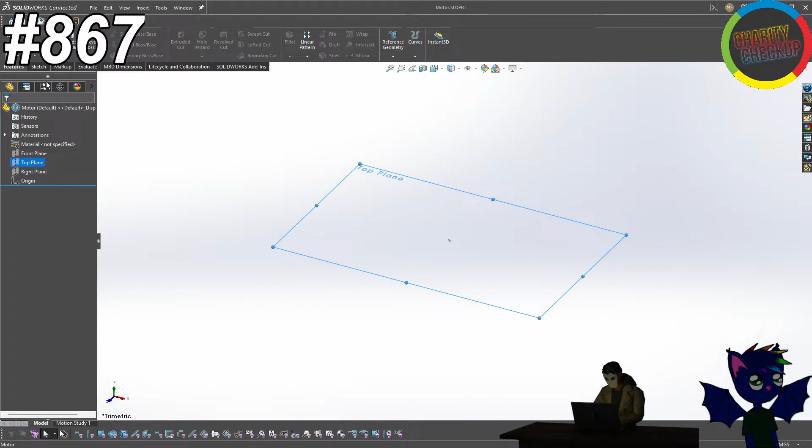37.5, I imagine. $37.5.

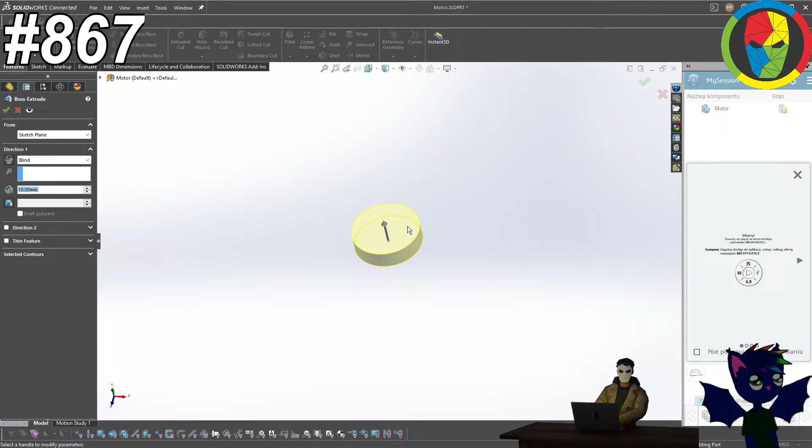Little things that will happen. Okay, then what we have is we have it going upwards, and goes upwards by... well, it would appear to be 57. It's difficult. 57. All right, appears to be right. Then at the back, and then at the front.

At the front we have a little bit of a cylinder with 4.5 millimeters upwards. Right. Wait, no, 4.5 millimeters upwards, I'm an idiot, 5. It's actually 5 and 13.

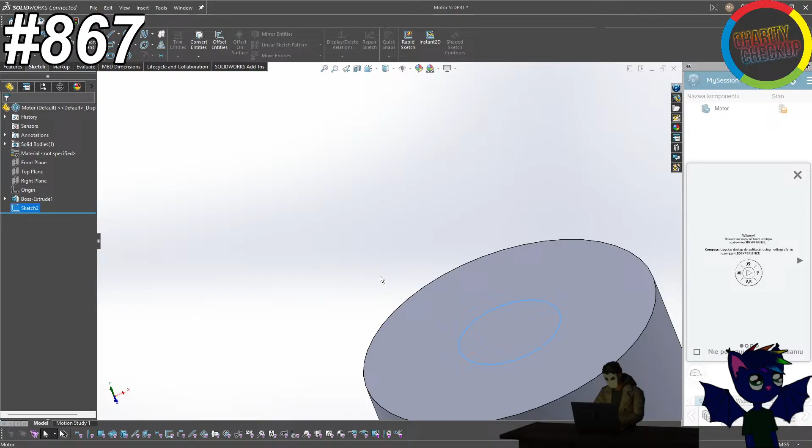2 millimeters height, 3 millimeters width. Perfection-ish, that's because then... actually, let's do 8.5 instead. 8.5, perfection-ish, yeah, we need the gear.

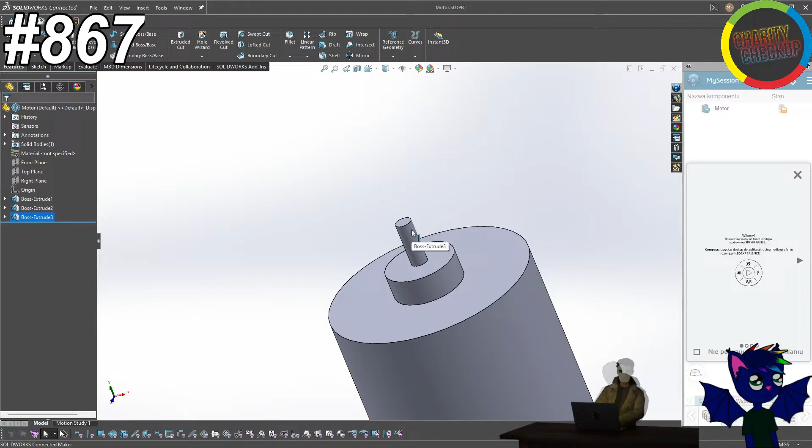Yeah, you got it right, David. Like... yep. It just got me off guard because first, I'm not expecting to see Hungarian text over chat, and second, it feels so random yet still accurate.

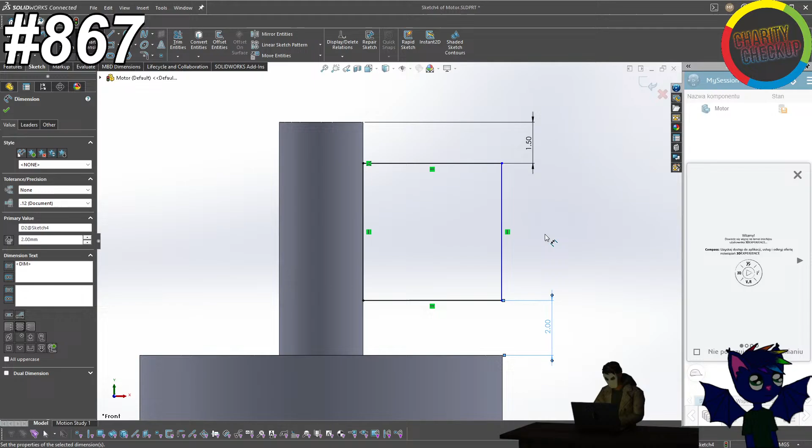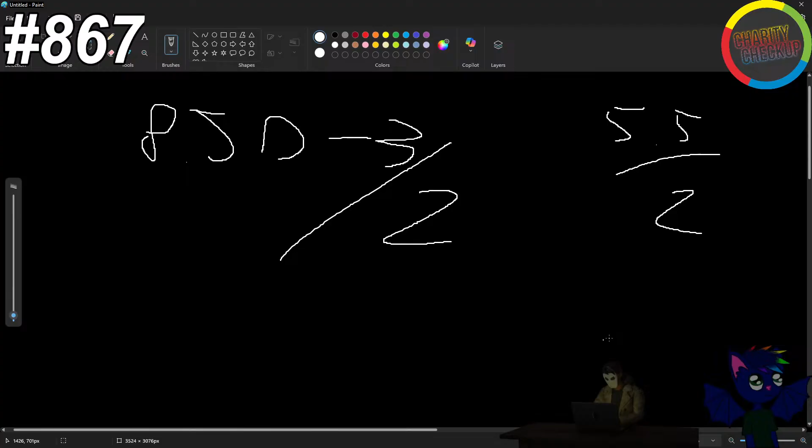Yeah, so this would be the divide by... oh shit. That's 8.6, 8.5. Eight point five, then that divided by that minus 3. So 2.75, I think it's 2.75. I'm pretty certain, not really.

Revolve cut? No, what I want is revolve boss base around axis being... oh shit, don't I have like... okay yeah, so I need an axis first. Gotcha.

Beautiful, this will be our gear. Sick and sweet. Hi, the cutscene, hi and welcome. Now all we need to do is we need to somehow cut into it. Which, how difficult should that be? Good question, alright, we need to cut into it to represent the teeth. Jeez, this is rough. And this is just the first part. Ain't that fun?

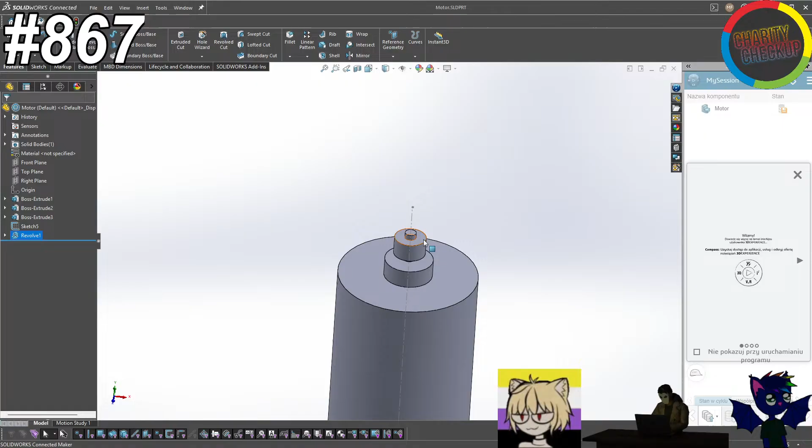Is that for Botty? It is for Botty, in fact, yeah, remaking Botty completely. A millimeter, okay. I gotta go, alright bye Mashrid, bye, have a good one. Bye, bye. We need a millimeter going in.

Then how many of them do we have? We have 1, 2, 3, 5... 12, we have 12. So we have 12 teeth, which would also mean 12 cuts. So we need to make 12 cuts into it. And each cut has to go a millimeter in, I think. Let's do a millimeter in and then... nah, shit. No.

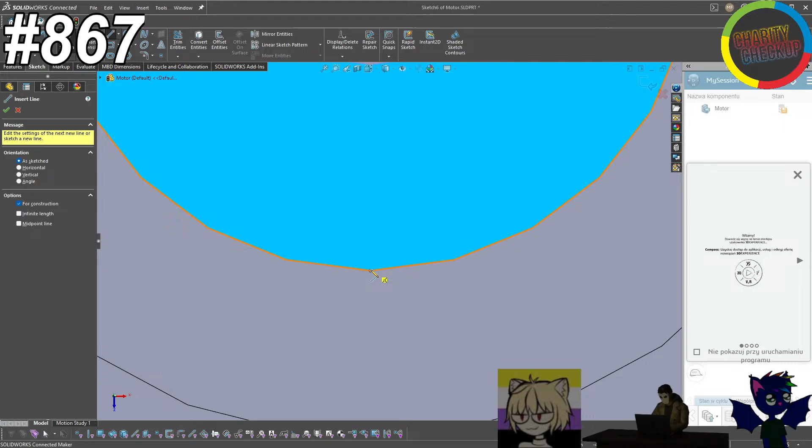Is there a hotkey for just turning on a tutorial to SolidWorks? That's curious. Okay, so 1.

So, style spline, and let's do it like this. Let's do 0.6. And we'll just have to eyeball it.

Is this the 3D printer app? What was it doing? This is SolidWorks, it's for designing things. But yeah, I'm gonna design for 3D printing, so pretty close.

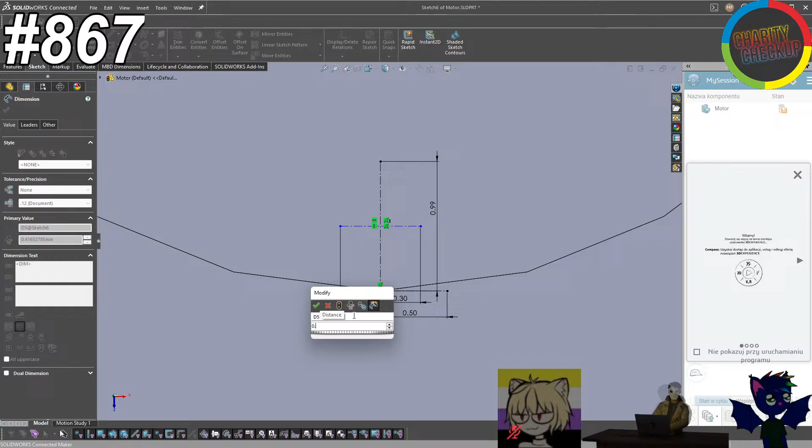This time with 0.5? I have no clue. How's your cat doing? Messing up everything. It's awful. It almost broke the camera, this stream. Cat being cat, it is pissing me off.

Already, okay, there we go. I think this should be good. I'm fairly decently certain.

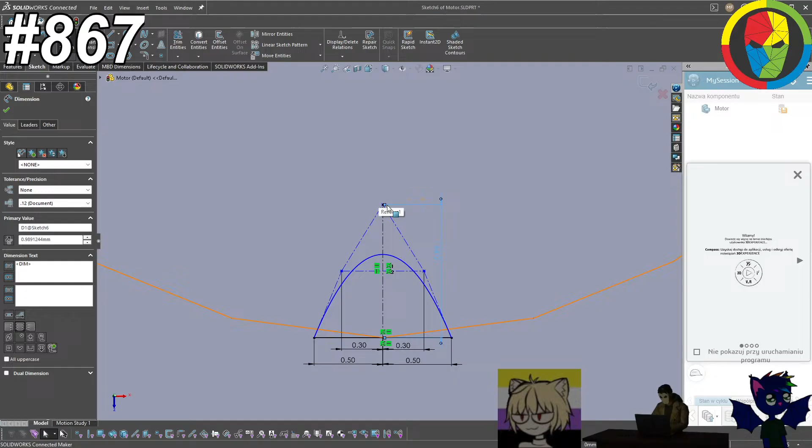But no, wait, because this is a millimeter, and so we need the peak to actually reach the millimeter. What are we doing? Which means right here we should have a separate line to use as a reference. Yeah, no, we need a separate line to use as a reference. To be fair, I just realized I don't actually need to model this gear that well. But whatever, we're stuck here. I'm doing it. Let's do 4.

Now I am pretty certain that if I just increase this number to a 7... Oh, you little cheesy bugger. Which means we can delete this.

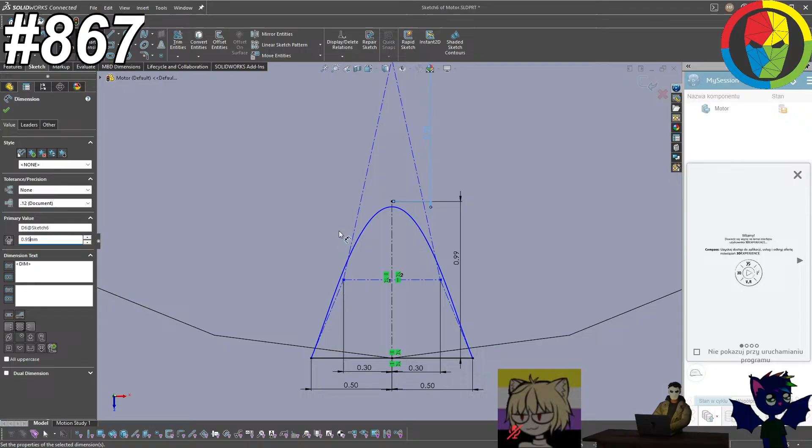And we can increase these numbers: 0.6, 0.7, 0.9, 0.95, 1. Oh, it makes sense at the half. Right, that does track. Okay, perfect.

My little dog's doing the same thing in the back, so don't complain about it. What is that? What is that comment? I don't have a dog, I have a cat. Bird. I don't have a dog that's annoying me, I have a cat that's annoying me. You have 2 cats that are annoying you.

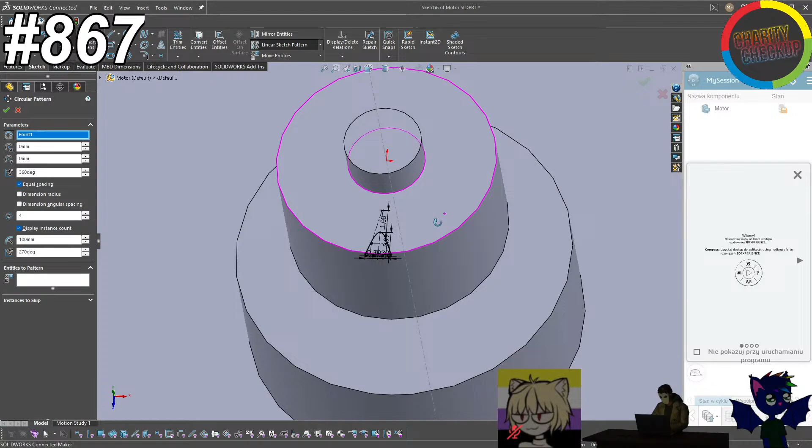Oh wait, is that direction? I don't care about that. Entities. Oh, entities to pattern, that's what I'm missing. There we go, we need 12 of them.

Yeah, I knew I fucked it up. Fortunately though, I'm pretty certain that if we just increase these from 0.5 to 1, or even 1.2, is good enough? I hope it is, or whatever, doesn't matter. You will explode in 5 seconds.

What's your problem? Hydroatomic! Jeez, it's been a while since I've seen you. Hi there, how you doing? Hi!

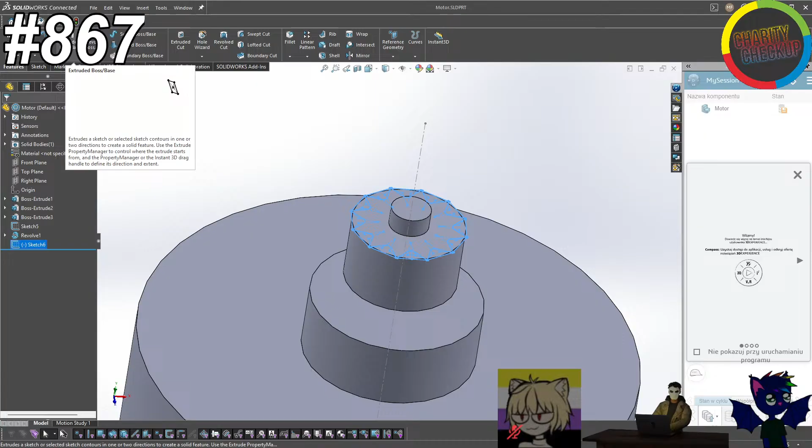Naked, when is your second quaternion video coming out? I don't know, I'm having a lot of fun with practical videos at the moment. So when I get bored of them... don't know how long that's gonna take.

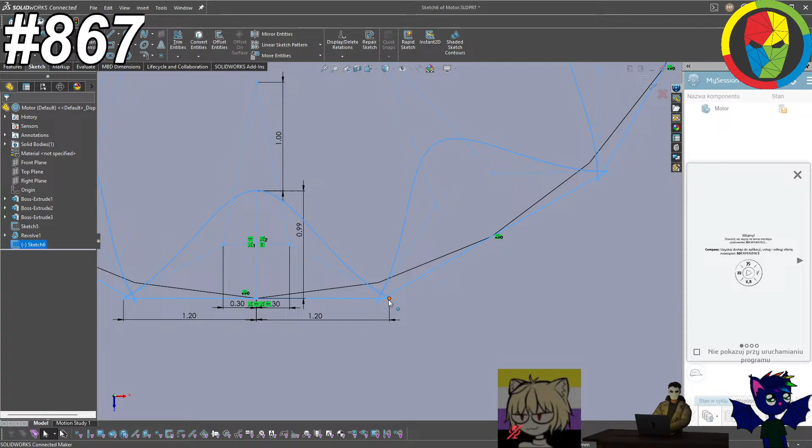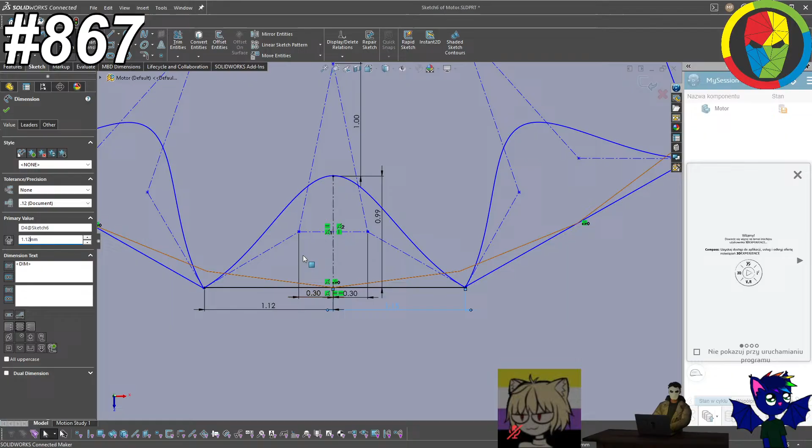In this case, I imagine the problem is these intersections. I have no clue. I think that's the reason, because this should be enclosed, shouldn't it? Unless I need to match it perfectly, in which case 15, I'm guessing. I'm guessing this would be it then. Yeah, that was the problem. Okay, good.

There we go, I have made a gear, behold. Spicy politics - oh yeah, yeah, it's actually taking a lot of effort nowadays for me to ignore them on stream.

That's just a sine wave in disguise. Not really, because I modeled it manually.

Okay, so then what we want is we want... oh, we want actually a couple of things. Yes. Oh yes, oh yes, oh yes, we do.

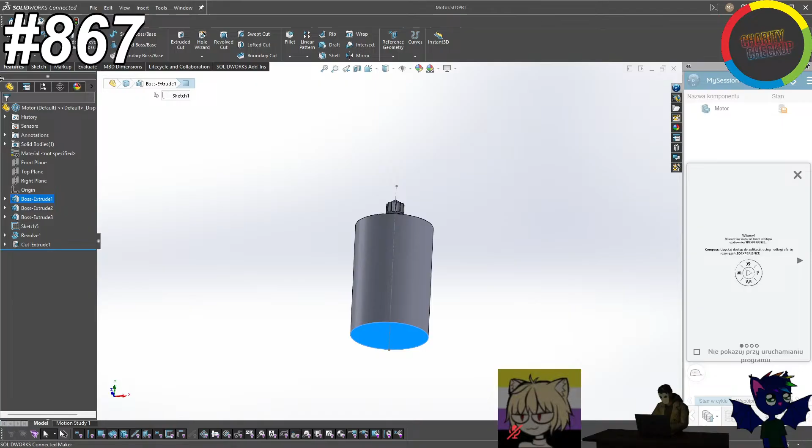That's because, you see, first of all, we need the dongles. Thought we were building a fusion reactor, sad. Unfortunately, not quite the budget. He's actually making a homemade RTG.

29. They are 29 away from each other, and they're 0.5 millimeter in thickness. The inner parts are 20. No, the outer parts would be 29. Outer parts would be 29 away from each other, and they would be 0.5 millimeter in thickness.

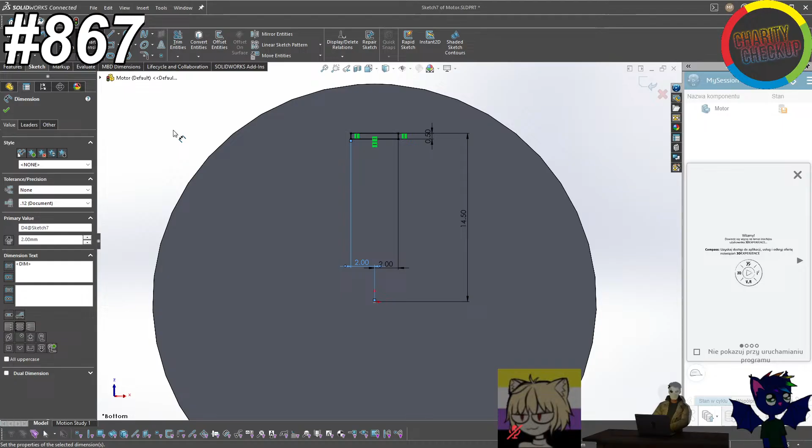So, 0.5 - not feet, that would be a bit much. 29 divided by 2, that's 14.5, like this. And then we need the width to be correct, and the width would be 4 millimeters, which means we want this side 2 millimeters away, and we want this side to be 2 millimeters away. There we go, proper. Then we extrude it for how much? 6.5.

We've got the motor, but there's one more thing I'd like to add. At the front of the motor, on the two sides, those holes are actually mounting holes, and an M3 screw fits in there perfectly, which means we'd like to add them in as well.

Good, about 30 minutes. Alright David, have a good one.

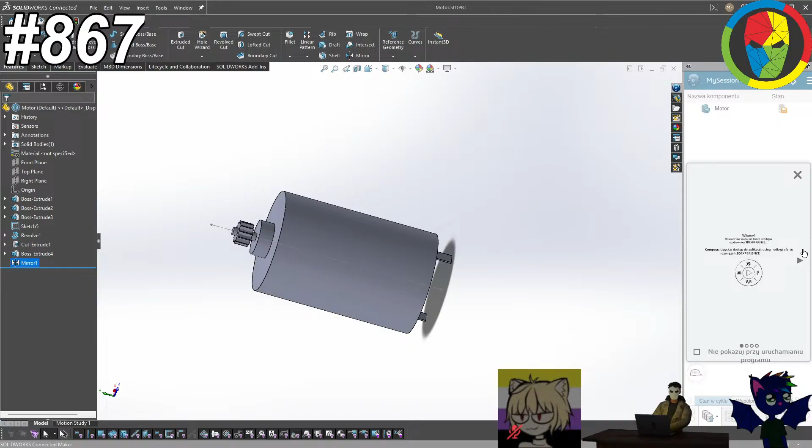The cylinders, the rough middles of the cylinders are like 24.5 millimeters away, and roughly on the same height. 24.5 divided by 2, that's 12.25, correct?

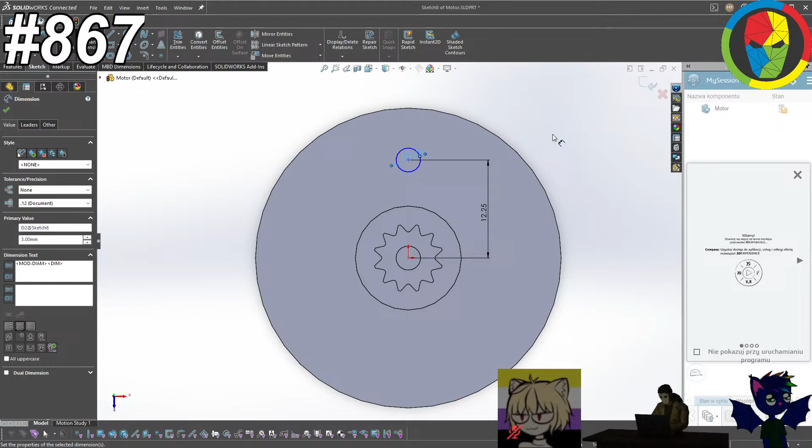Then we use it to make, not a Hole Wizard, damn it, I pressed the wrong thing.

There we go, we've got our motor, and it looks like the real thing, doesn't it? It really does look like the real thing. Close enough. So this will be the thing that will power Botty.

Now we're back to issue number one, which is the fact that we need to somehow plan the entire design and then start designing it.

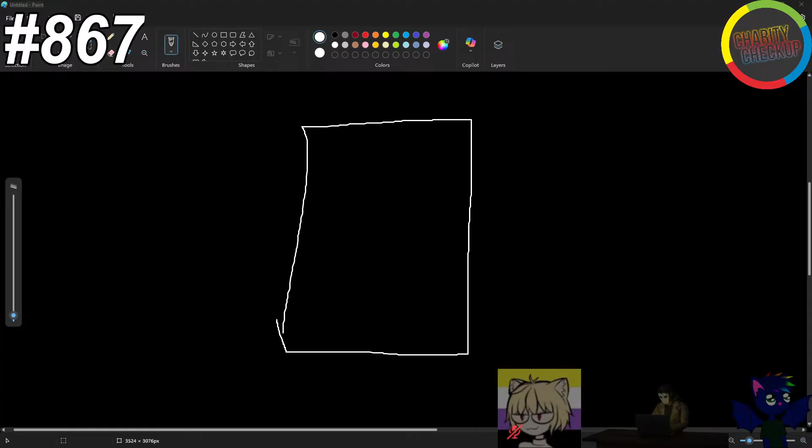Alright, here was my idea. We'd have a plate like this, and then we'd have two motors, one in the front, one in the back. The front one would go to the right, the back one would go to the left. We'd basically have a transmission system going through like this, and they would both meet in the middle, where they'd be used to power the tracks. That would give us quite a fair bit of space - we wouldn't have to make the entire thing too wide, which is nice.

But then the track system, that's what we'd need to fix. Ideally we'd use some kind of gear generator, because we want them at an optimum distance from each other, which isn't quite as simple as it seems on paper. But we can manage.

For now, what we're going to do is make a simple plate with a simple case for the motor, and that's it.

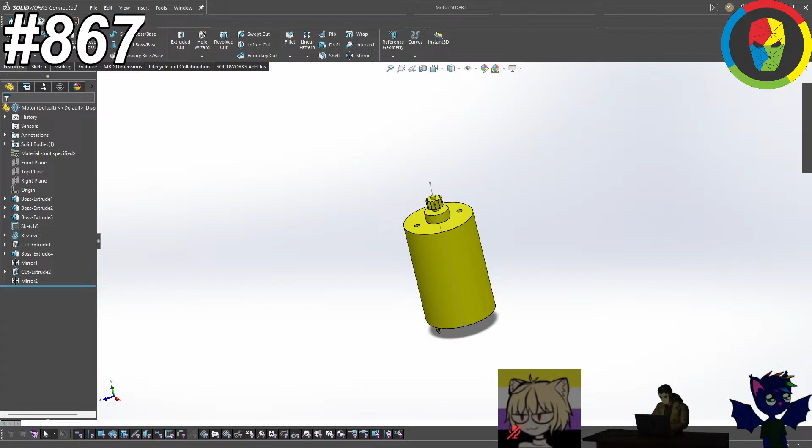Alright, motor case. We could just have mounting holes at the front - yeah, that's what we're gonna do. Simple square. And how big will the square be? Well, I imagine a bit bigger than this.

I could just use the case I've already made, but I'm doing it from scratch. 13, 35, 37, of course not 13. So 40, I imagine, could even be enough, but we'd probably like it slightly bigger. This one is 40, so 40 could be enough. Yeah, let's do 40.

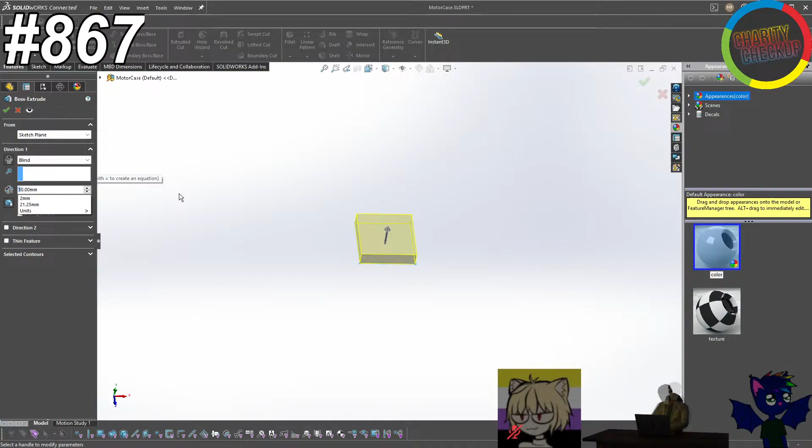Alright, so we don't need it to be that big. Let's just do a solid 20. Or 30.

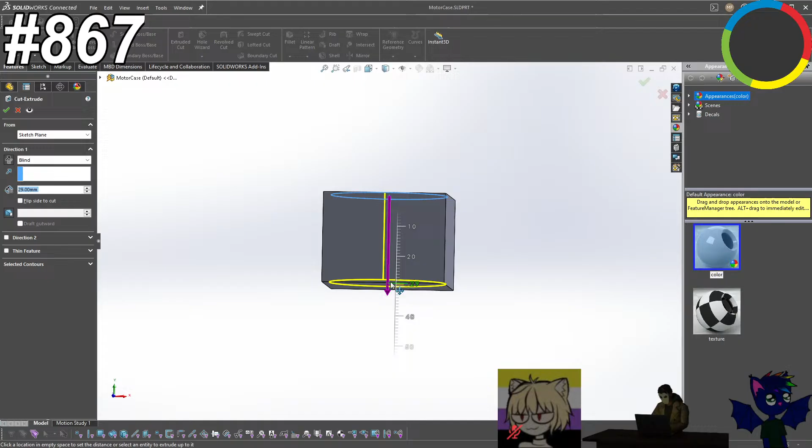Alright, first we need the... yeah, let's do 13, a bit more. Let's do 13.5.

And then the mounting holes, which will be at the sides - perfect at the sides, with... what's the distance? I already forgot.

Right. My mind went just blank for a second.

That was 24.5, wasn't it? So that was 24.5 divided by 2, that's 12.25. So 12.25 of a distance. And then the entire thing's thickness - we want that for an M3, which normally would be 3, but we're gonna go up to a 4, just because it makes things ever so slightly easier.

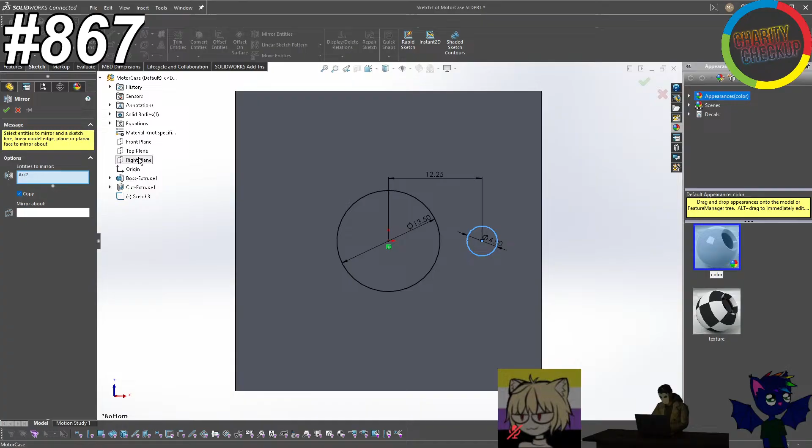And there we go. Now we're gonna print it on this side, so this should be printable. The reason we're gonna print on this side is because we'll have an additional thing going off the sides, and that will be our mounting.

Right. Yes, I think 2, that should be fine.

Alright, perfect. Ish - no, I think this is good actually. There we go, I think.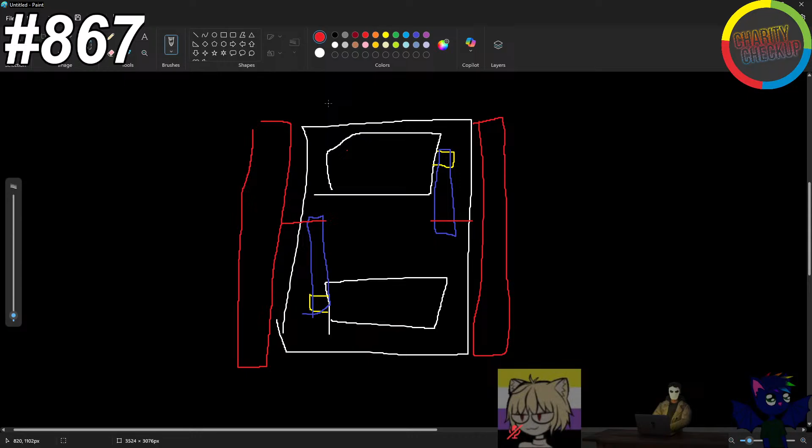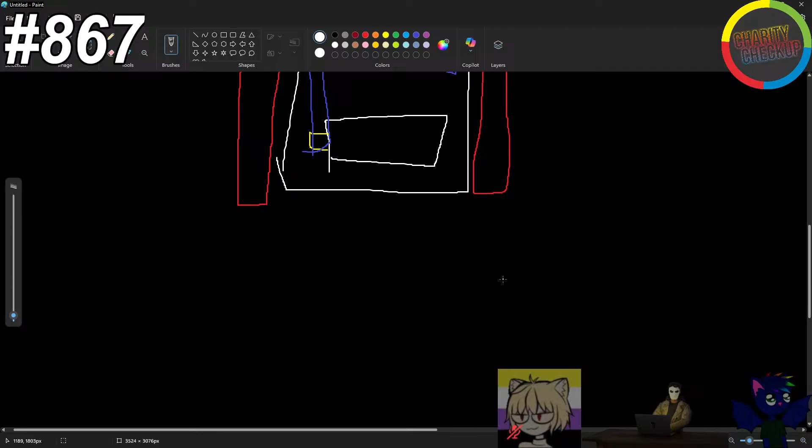Now we need to roughly decide what would be the size of Botty. Roughly, because this is a problem - we don't know how difficult it will be to fit everything in later on. I think 160 by 90 may be good. For now, yeah, we're dealing with 160 by 90.

Then, in order to center it in the middle, we'll have equal to W divided by 2, and equal to height divided by 2.

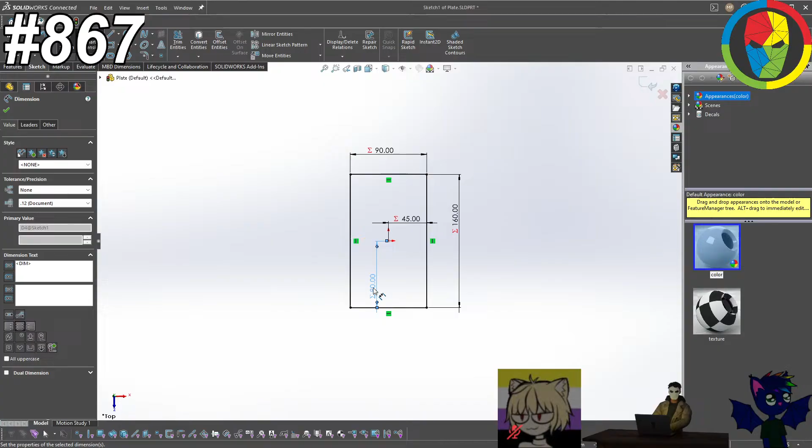Perfect-ish. This tool, just like something a bit more chunky. 0.5 centimeter. That's thick. That is indeed thick with a capital TH.

My calves have died, what happened? No, oh, you're sick and have a fever. I'm so sorry to hear that, hope you feel better, get well soon. And what are calves? On your legs, that's as close as I can give you. Oh, those muscles, ah yeah. I'm guessing because of the trip, the hike.

Unless of course I do this. Well, that would be quite clever.

Wait, did you catch a cold or something? Or... no, maybe I'm high, but can you catch a cold in India? Hold on, no, it's not cold there. So I need to add—maybe I'm high, but can you catch a cold in India?

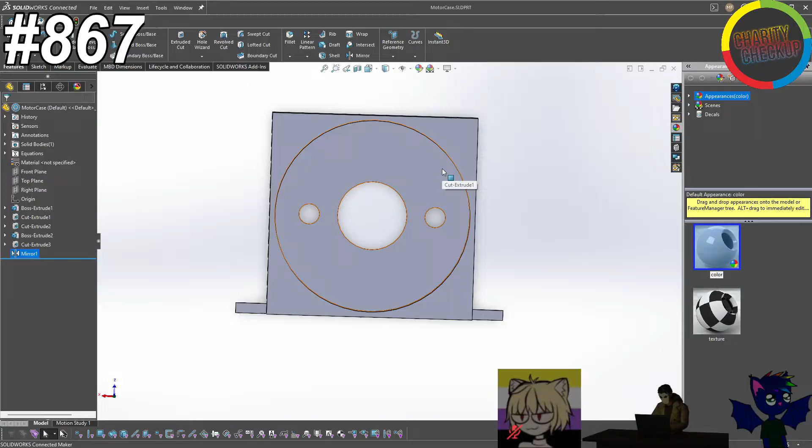Okay, what's the size of... I'm just having the best questions today, don't I?

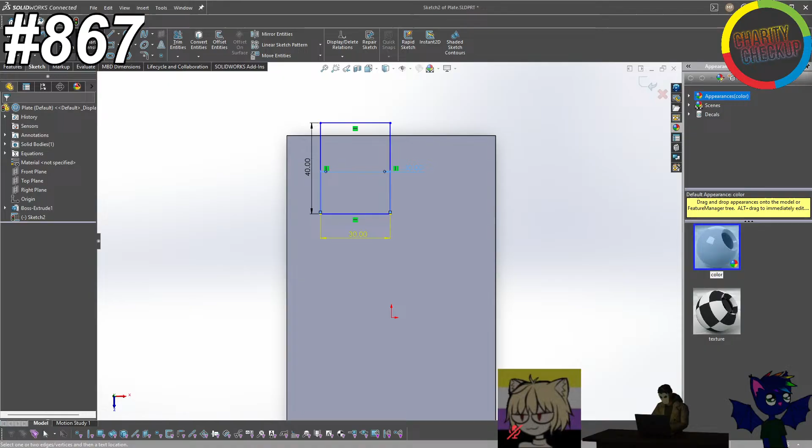Okay, but you can't just have a fever on its own. The fever is always a response to something. Okay, but fever is not a disease, fever is your body's reaction to a disease. You can't just catch a fever, you catch something, and to that your body responds with a fever. Yeah, I think the implication was that Buff's brother got something that caused the fever and then infected his mom's sister, and then it got Buff. I think that was the implication.

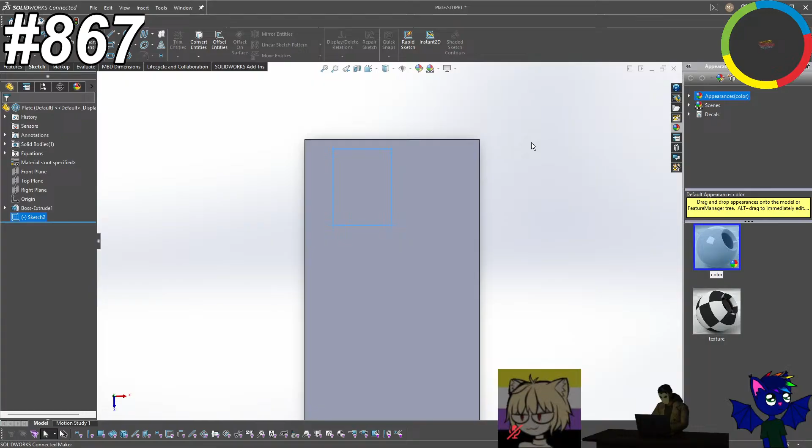Okay, but okay, that's really sad, and I hope your family is doing fine soon. But like...

Be a centimeter, at least. That's because right here will have...

Slept all yesterday. That sounds like COVID a bit.

Can I do a circular pattern with just direction? Right.

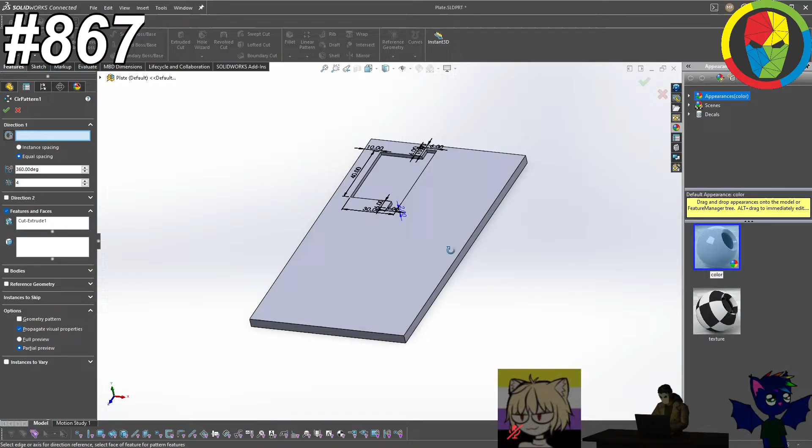Perfect-ish, almost, if I could only pick the center.

It can be the fever that makes you feel like you're dead. I mean, depending on the level of the fever, I guess. Like, I had slight fevers before where I just decided to put on a mask and go to the parade in a neighboring country because why not. I wasn't that sick anyways, I did pass out a few times, but that's not the point. But then there's the other kind where I just lay in bed the entire day and sleep and suffer when it's really bad.

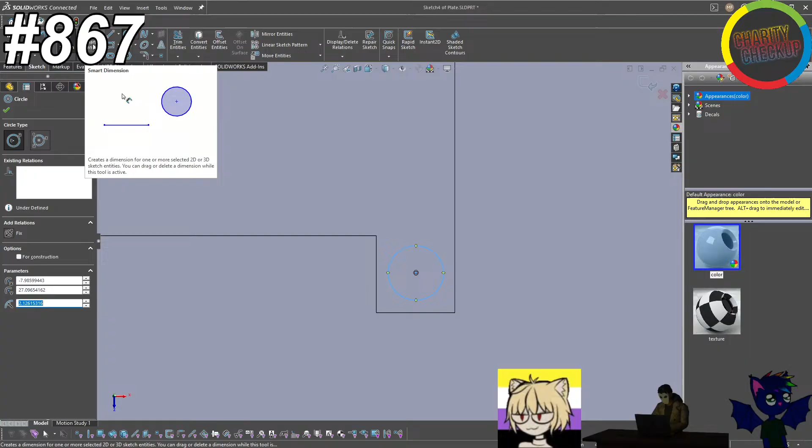Man fever, I'm back, what's happening? Timon is telling us about his man fever that he had. Oh, I have a fever too, actually, right now. Yes, you have man fever, or do you have just a fever? What the fuck is a man fever? Well, man fever is when you're basically dead because you have 38 degrees Celsius fever, that's man fever. I have 30 degrees, I'm fucking alive, I'm chilling. I'm not Timon, maybe that's why. There's a male stereotype that when men get sick they just overreact by a lot. Yes, the man fever, you overreact. I don't overreact, you know. Yeah, because you don't have man fever, I have gay ass fever. That's 37.9 degrees, it was 0.1 degree more, that would be man fever. My bad, sorry, maybe that's why.

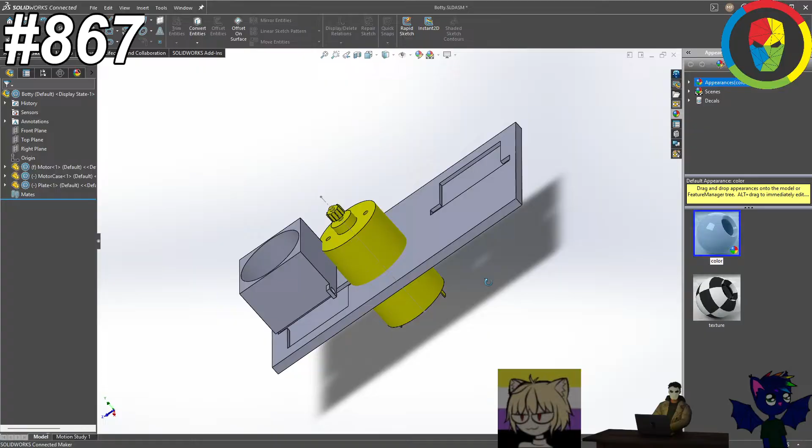Wait, hold on, let me dig up that meme. What is this, dead chat gamers? I don't know, with the fever talk apparently nobody's speaking. Yeah, apparently fever is just so unrelatable to normal humans who never get sick, you know. I don't ever get sick, I think getting sick is for you weaklings. Never go outside, that's why. I go outside all the time, I've been outside so many times that outside's been me.

Why can't I move this? Yeah, sure, why can't I move the...

Oh shit, no, that's not what I wanted at all. No, first we want the plates. Here we go, yeah.

And now it's time to see if I've done it properly.

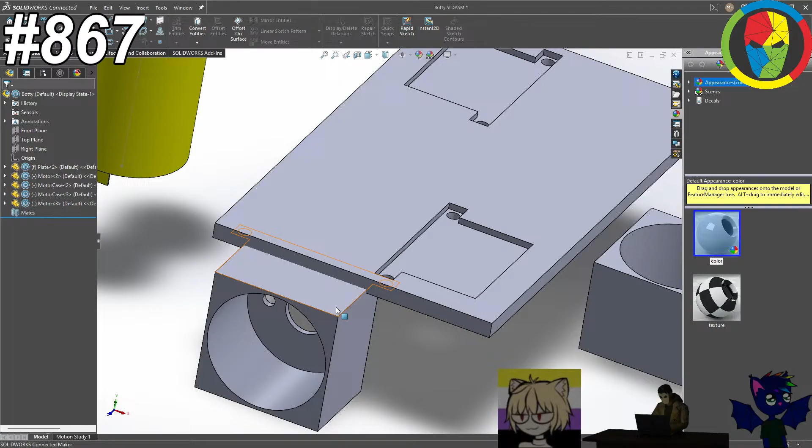I don't get the fucking man fever meme. Do women enjoy having fucking fever?

Timon, did you used to enjoy having fever? Shit, I've done it backwards. Oh shit, I've done it backwards.

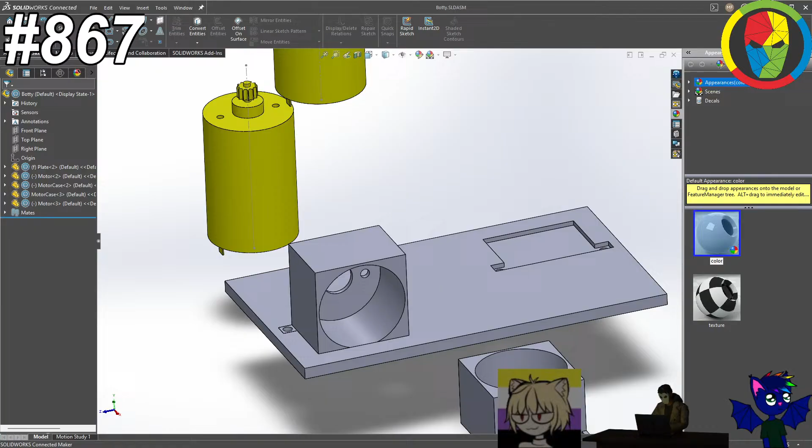Fuck. Hi, Ninja. Ninja was in your dream today. What?

I fucked it all up. I need to just... Now we have to fuck it all back down. I do have to fuck it back down.

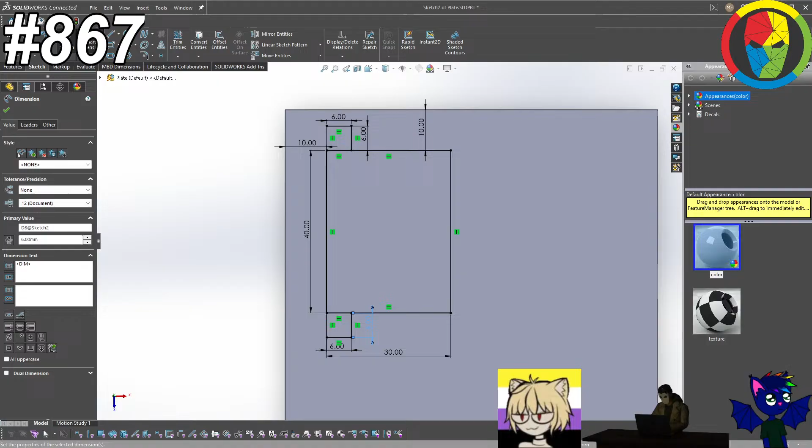Yeah, I know, Bev, that you can't access that channel. That's why I shared it in general as well. Why can't Bev access that channel? Because he's a giver. Oh, the live voice channel. For a second I thought you meant the stream child channel.

This is the proper way, because that's the forward. Continue, ignore error, close, alright. Could be worse, it's because right here.

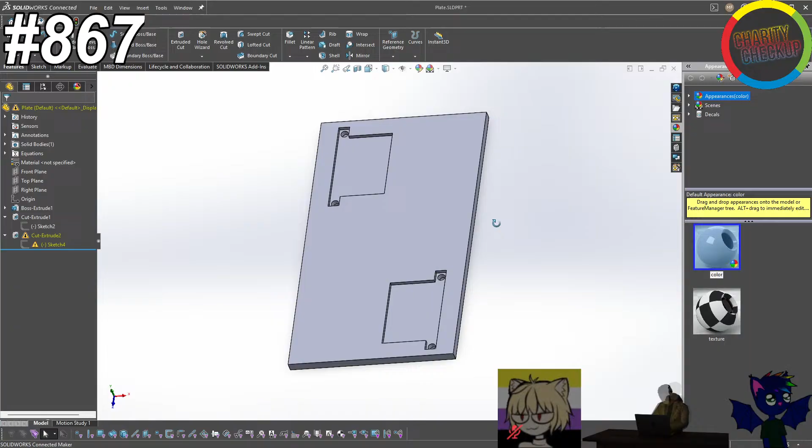I'm sorry, what is the error this time? Could not find faceplane. But everything compiled properly, what do you mean? Oh my goodness, okay. How do you fucking get syntax errors in a fucking design software? No clue.

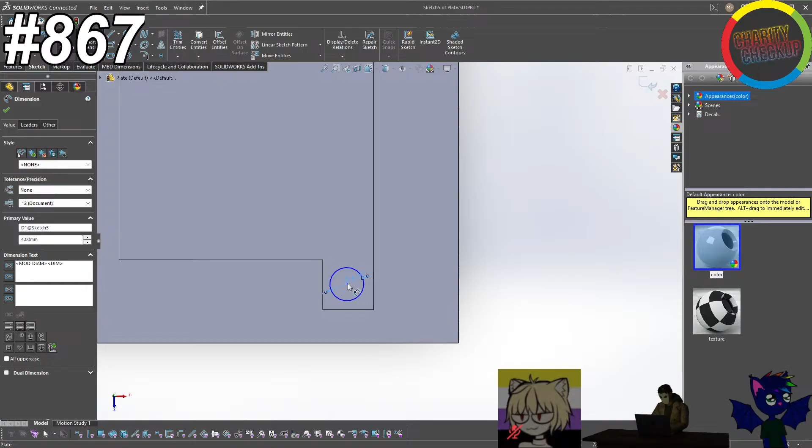Like we're gonna die. Well, Bev, the doodad's name is Botty now, and it's dead.

What he meant to say is you're misnaming the doodad, and the doodad will kill you now because it's Prime Mon. It's a special killing feature in Botty. Yes, for everyone who deadnames Botty, they just burst into flames. Yeah.

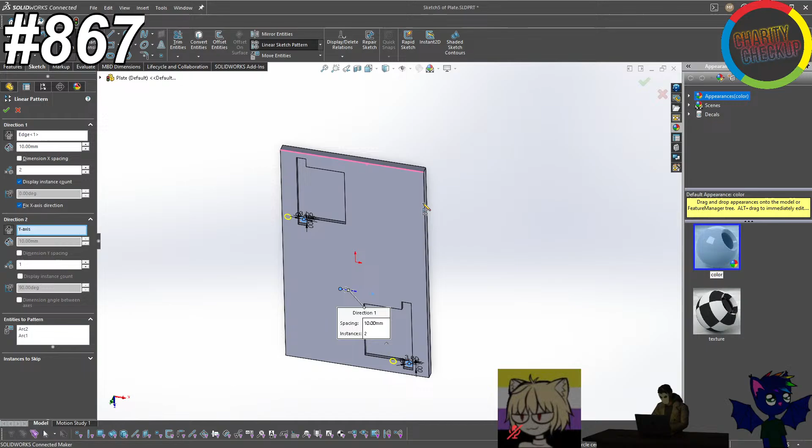Wait, how? Then we need to figure out the proper distance, which, if I'm gonna guesstimate, it's going to be 46.

I think so, okay. Alright, there we go. Now if we go back to the assembly part, all of the mates are broken.

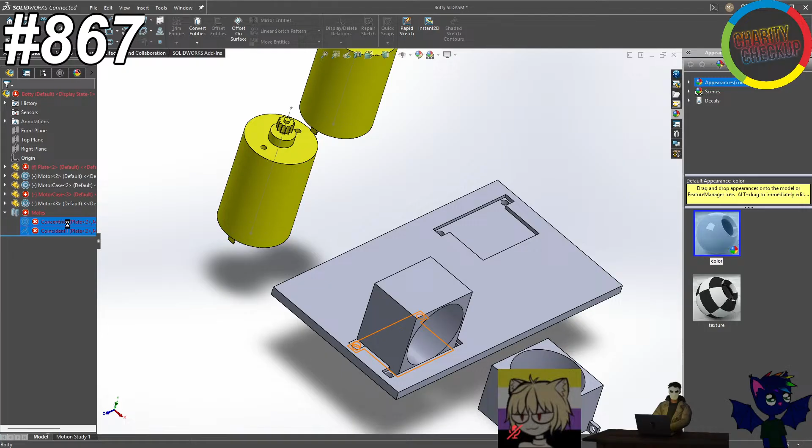Hold on everyone, I'm mating Botty. This is important, give me a second.

Hey yo, what will Jesse think about that mating? Machines, what a surprise, I would not have guessed that ever. Yeah, make a mating tutorial, you're welcome.

Yeah. Someone, let's... damn it, the mates are so annoying to deal with sometimes. There we go.

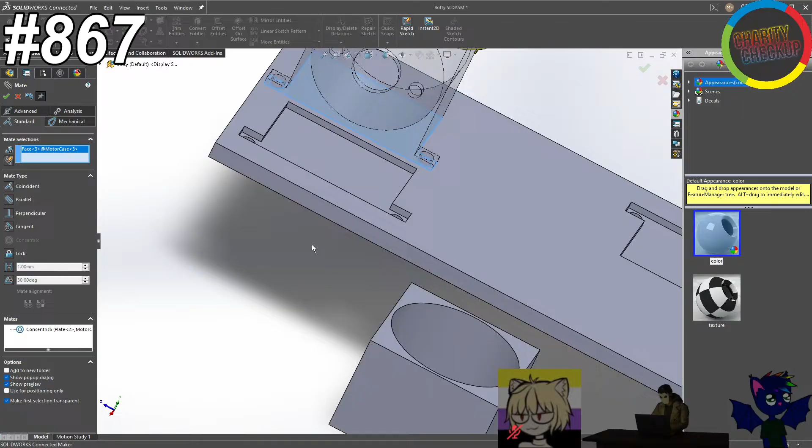Oh, perfection, look at it. Beauty, absolute beauty. Now it's time for the other one.

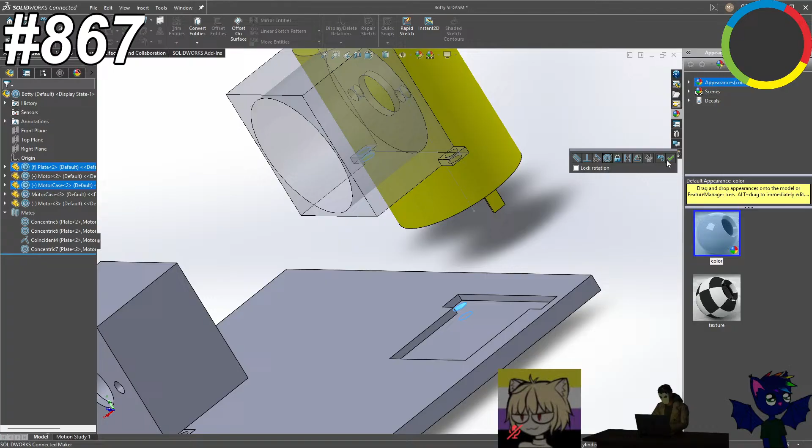You're right on that, Ninja. VR Technophile, yeah, you got a problem with that? Like, look at humans and then look at machines and then try to tell me I'm wrong. My kid designing a mating press.

Okay, that got me laughing way more than I admit to. That's pretty funny. Okay.

Okay, so then... Like an infusion, this is my strange addiction. Have you seen trains in Satisfactory? That's all I'm gonna say.

Okay, then what we do is we get back to plate, and right here we do another sketch. This time we do it higher.

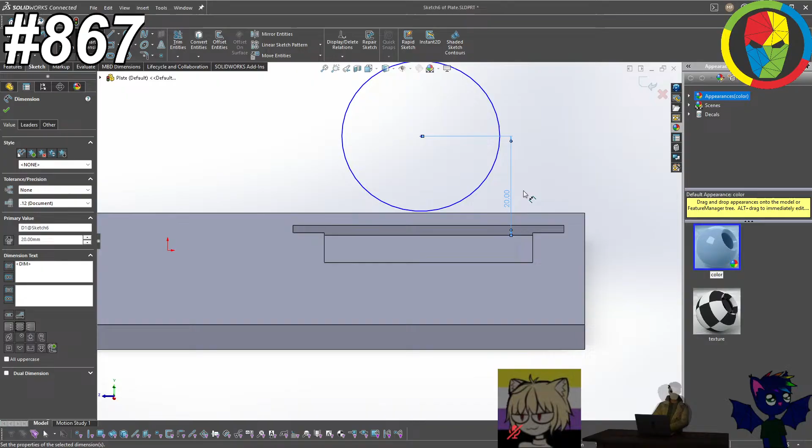What should be the distance between that and the middle? Well, that would be 20. There we go. And then this one would be 37? I think, might be wrong.

Well, easy way to check. 38. Thank goodness I checked.

The lack of perspective makes my brain think that I'm... the lack of perspective makes my brain... we can tell, I can do this, I can do this. The lack of perspective makes your brain, and then just fill in the blank. Think that I'm tripping. Yeah, I did it. It's giving you a brain job. Tell, yeah, we could actually tell.

Alright, how long is the motor? It's roughly 57, but let's do 58 just for good measure. Oh, why not, let's go for broke. 59. Hell.

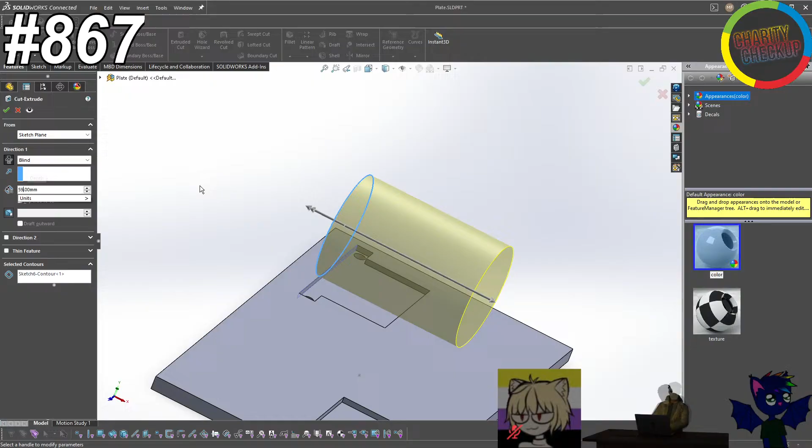Imagine 2 onions. Heck, imagine 3. There we go. No, I want 500 onions.

Great then, oh wait, but this is in the middle. Ah, thank goodness I thought ahead.

Oh, you won't let me, so I need to do it like this. That would be 20 plus 6, so 26. I think plus 6, okay. Oh right, seems close enough.

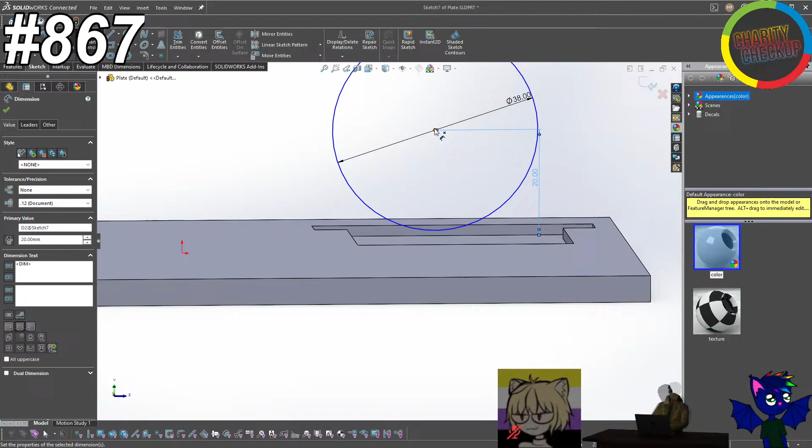Then 20, and then 6. And then what was this again? That was 59.

There we go, and now we get back to Botty. You can see that we can, in fact, mate the motor properly. Oh yeah.

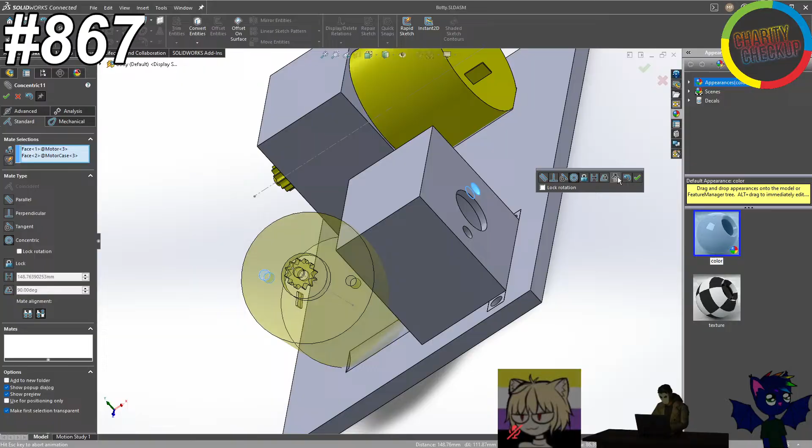There we go. Actually, we don't need it to, because they will snap from top down. Okay, so there we go. This will be the basis for Botty.

From there on, what we need to do is design some kind of transmission system that will go from the back to the middle. And then it will have to meet in the middle, hopefully transmit enough to actually cause movement. Oh, it's gonna be such a pain. I'm not certain actually how I'm gonna do it.

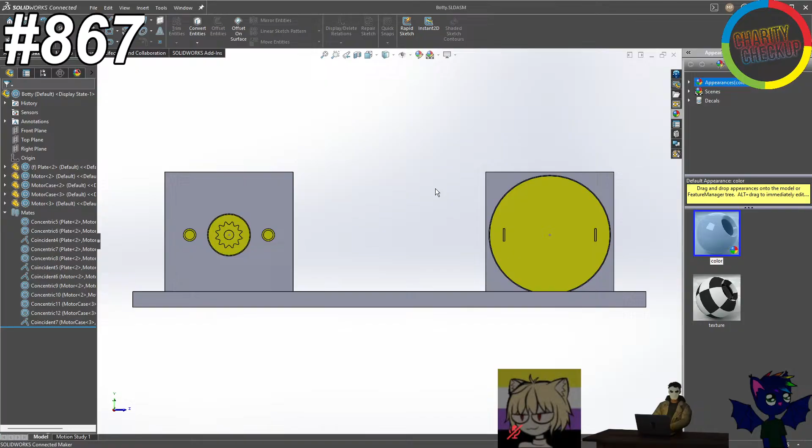So basically... and then we need to... but how are we gonna do it from sideways? Ah, that's a good question. We could make like...

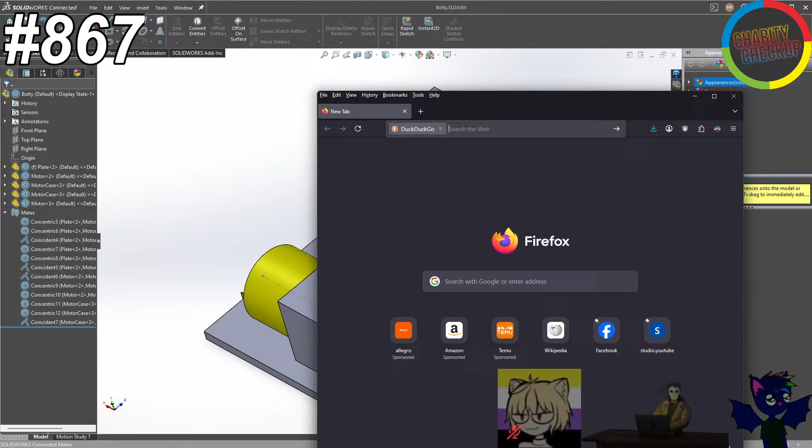What we need, because here's the thing, for any gear there's an optimal distance for them. So here's the pickle we're gonna have to put it all into perspective. We can't print gears with too small of teeth, because if the teeth are too small, the printer just won't be able to handle them. The teeth can't be too large either, because if they're too large, we won't be able to fit too many ratios in. So the smaller the gear, the more ratios we can fit in. The bigger the gears, the bigger the teeth, the easier it is to print. So we need to find the sweet spot.

What if you don't print them, you buy them or something? They're made of metal or expensive stuff. They're really expensive, especially for the amount we need.

So then what we need is basically a certain set of discrete lengths that we can merge together. So basically we'll have a certain set of line sizes, and out of these line sizes we need to create a path that ends exactly in the middle and at the exact right height. To be fair, the height may vary, so that's good, that's something we can control. But it has to be perfectly in the center. And then only once we do that, we have the gears in place. And then around those gears, we'll need to create a stand to hold those gears up in place. Also, the gears cannot be too small because our bearings are this big, which is actually really massive. Which means the gears would have to be pretty large by themselves, which means that the smallest possible length is already pretty big.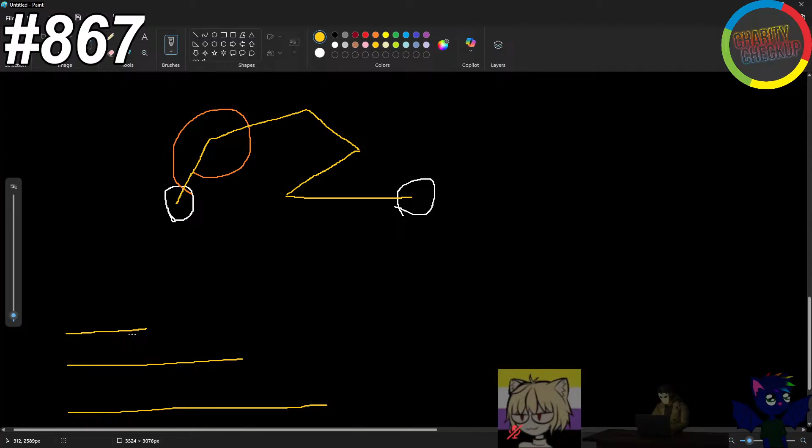There we go, we will have our module. I like a 1, would be nice. A 1 would be certainly nice. Number of teeth, it would be neat to have like a 12 that then goes into like a 60 maybe.

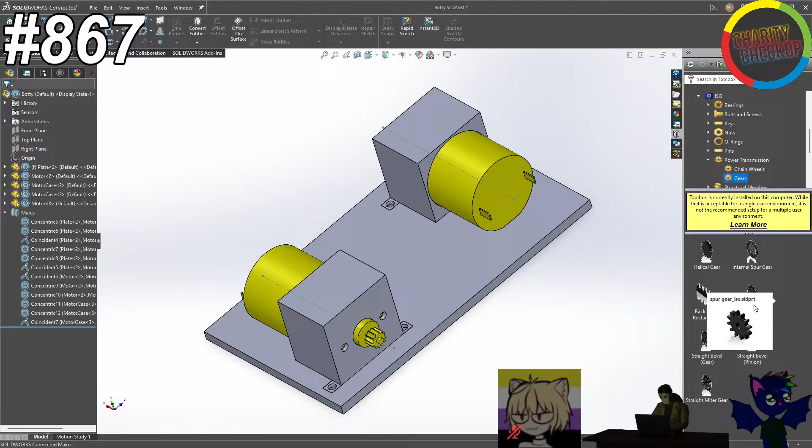Pressure angle. Oh, is that pressure angle? Right, in SolidWorks we do have the toolbox in which we can go into the power transmission and gears. And then we can generate number of teeth, pressure angles 12, 20 or 14. We'll check which one yields the smallest distance. 20 and 14.5.

36 millimeters. Oh, it's the same, why do you need them? Okay, so 36 millimeters.

Bev, you can murder with anything if you're committed enough.

No, I don't know the context, we made it saying it's pretty big. I was talking about my... well, definitely not that, my caliper, you dirty animals. What's he making now? I'm making a robot. It's just funny because I started the livestream by dismantling a robot I've made. It's the circle of life, okay.

36 millimeters, that's not bad. Is it? No, not bad at all.

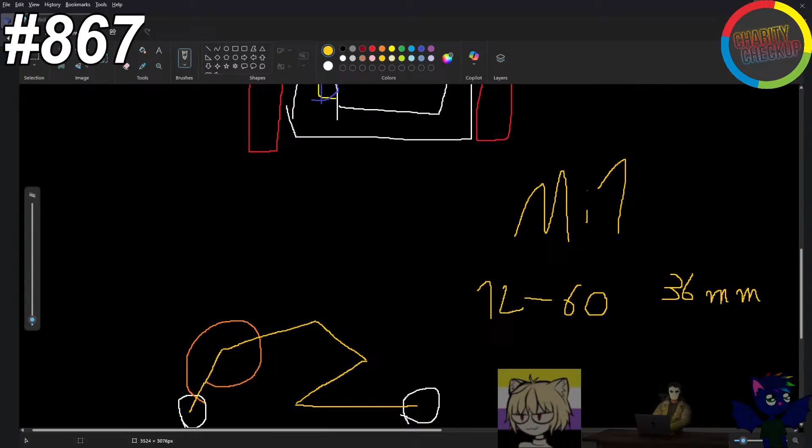Okay, so here is what we need. We will have 12, 60. So first of all, module will be 1. Then 12 to 60 will mean 36 millimeters, that's the distance between 12 to 60. Then let's do something different, let's do like 30 to 60. That's 45, alright, so 30, 60, that's 45 millimeters. And then 12 to 30, just for good measure, so 12 to 30, that's 21. Okay, so these will be the discrete values we can deal with.

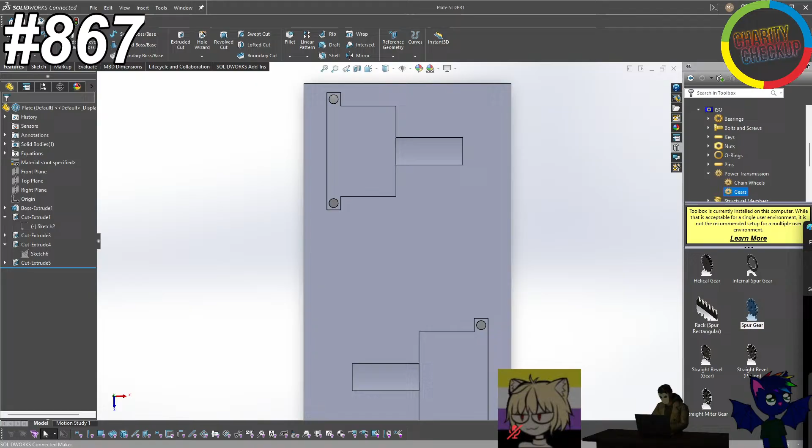Because it's 60. Okay, so the size of the entire thing is 160. Which means 160 divided by 2, that's 80. And then 80 minus 30, which means this distance is 50. Which means we need to somehow add together these distances at different angles in order to achieve as high of a possible transmission in the span of 50 millimeters.

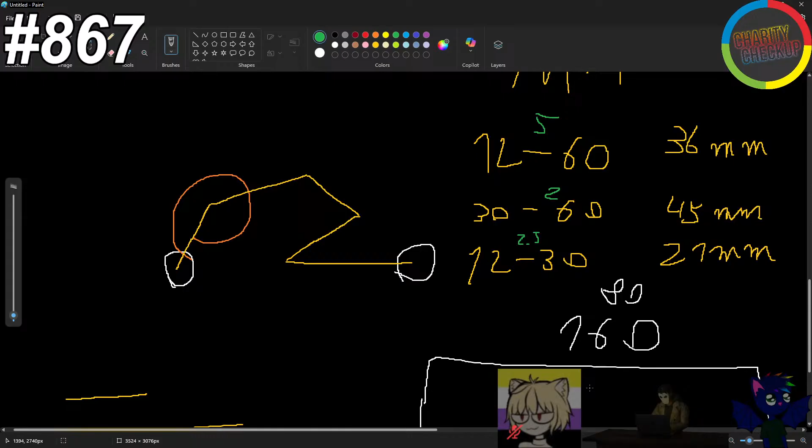Right, no, that's fine, whatever. That's good.

We can start with the gear being 12. We'll just need to make like a little adapter from the whatever the module is on the motor into the module 1, which we will be using. And then good luck with your robot. Thank you, I might need it. And then we just need to do it.

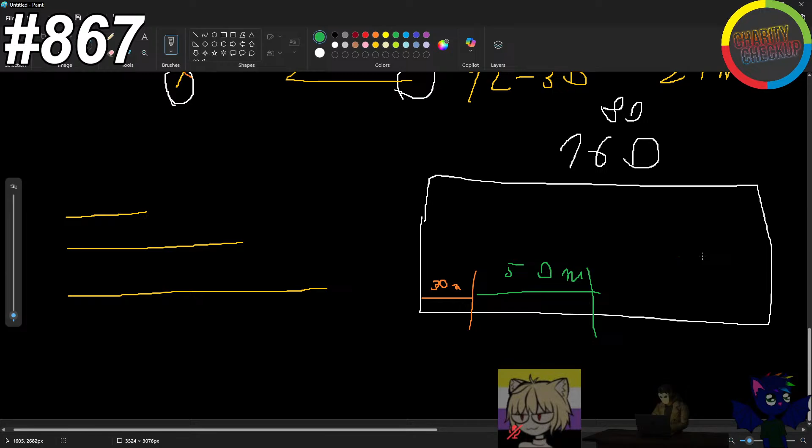I'm going to make... oh, I can model in here, that's nice.

Okay, so we'll have a line going like this. Right here, smart dimension. For now, we'll just do about 20. We'll see what gets to that later on. So we start at this point right here. And then what we need is the discrete distances.

Right. On it. So first things first, we're gonna go a bit up and we'll try to do 12 to 60, which is... 36. There we go. This will be our first one, which will give us a ratio of 5.

Then, hopefully we'd like to go straight down, I imagine, because going straight down is efficient. And you could do another 12 to 60, which would be another 36.

Well, we need to do only 12 to 60s, don't we? Will this distance be enough? Well, if we design it properly, I think. I hope. I wish. What's this distance? That's 28. Okay, so now what we need? Shit. It's 28. Okay.

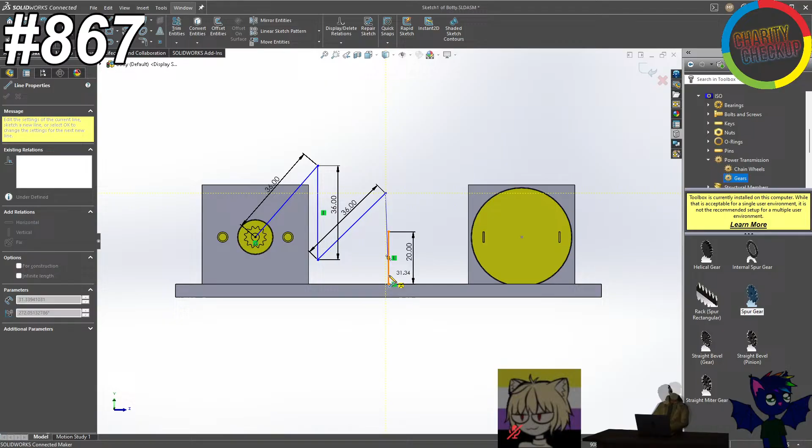Which would mean 36 again. And then this, we'd like to go onto this line, which we could do with some kind of shorter distance, 21. That's 12 to 30. So we could do this with 21.

Okay guys, this summer heat and humidity is just suffocating me, so I need to go to another room for 5 minutes. I'll be right back.

Right by 13.79. Okay, this is what we deal with then. And this. Oh shit! I knew it! Wrong measurement. Absolutely wrong measurement. The measurement we were supposed to take is this.

Go, 21. Yes! Beautiful. We can delete this now and go straight down like so.

And then the height we get not- is... Hmm, what? No, nothing. Okay, what do these rectangles make it? Which rectangles? You mean these? That's just me setting the distance, the length. Okay.

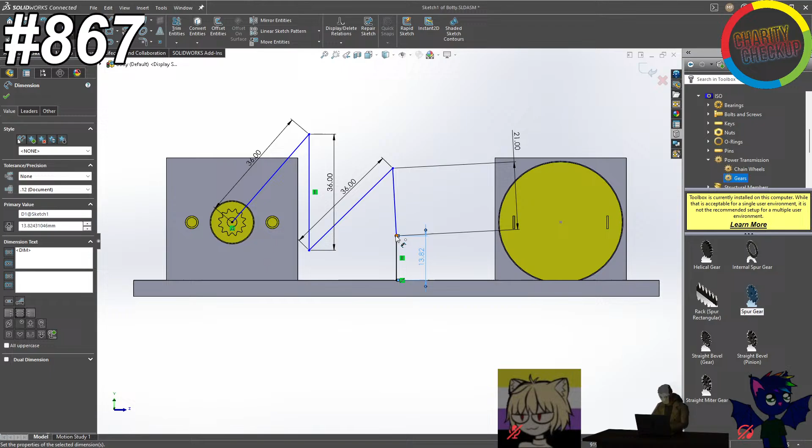Okay, so at each one of these points is where we will get a gear. And then what we need to do is we need to design a gear system that will have the bearings on the inside. And then once we have done that, hopefully right here we will have the final gear with the correct transmission that will go out, and then from it we'll just need to build the track system, and then once we have the track system, we're basically finished. That's all the difficult parts done.

Oh, it's quite tedious. Okay. Anyway.

I think it might be it for this stream. It's been quite tiring. Yeah, it really has been. Yeah, I like kind of lost the plot when you started to talk about gear ratios. It's just me trying to like get as much talk possible in the slim amount of space I have.